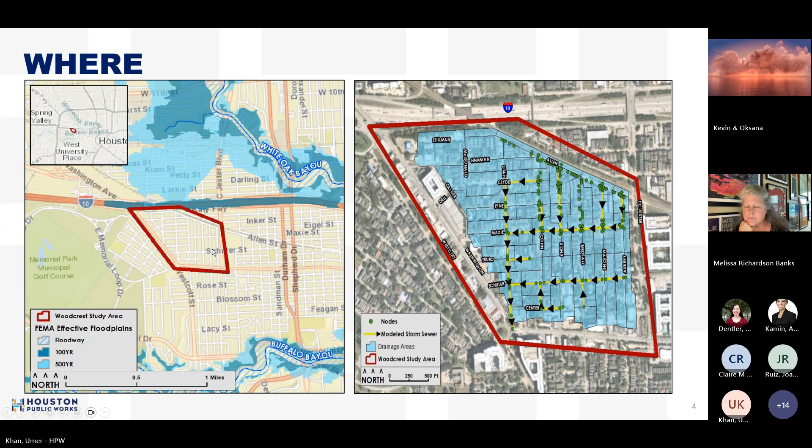So the project was subdivided into 2 phases because of the cost. But since Centerpoint relocations took up a year or so, the construction will be completed together for both phase 1A and 1B. In a minute, we'll talk about what each of these streets encompasses: Cohn, Allen, Birdsall, and Knox Street.

The project goal is to provide a 2-year level of service within the subdivision, and we also have potential for future improvements. As the Councilmember said, there's a vast, bigger drainage study done which has identified more improvements that we are finding other avenues to fund. If that comes in place, it will also help other areas as well. Again, 2-year level of service is 6 inches of rainfall within a 24-hour time period.

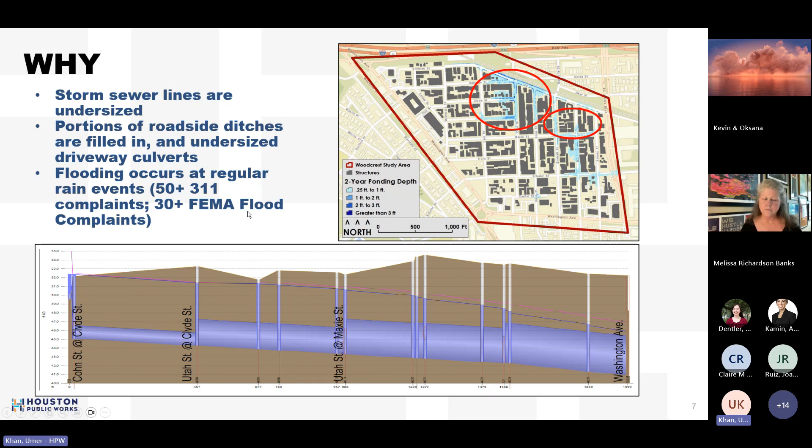Why the project is needed: as most of you would know, the storm sewer lines are undersized. Some portions of roadside ditches are filled in, and there are multiple flooding reports within the subdivision. There are 50 plus 311 complaints, and also 30 plus FEMA flood complaints, which is structures flooded within the modeled area.

Severe flooding during a 100-year event. During a 100-year rain event, the stormwater exceeds the right-of-way storage, and you can see water way beyond the right-of-way as well.

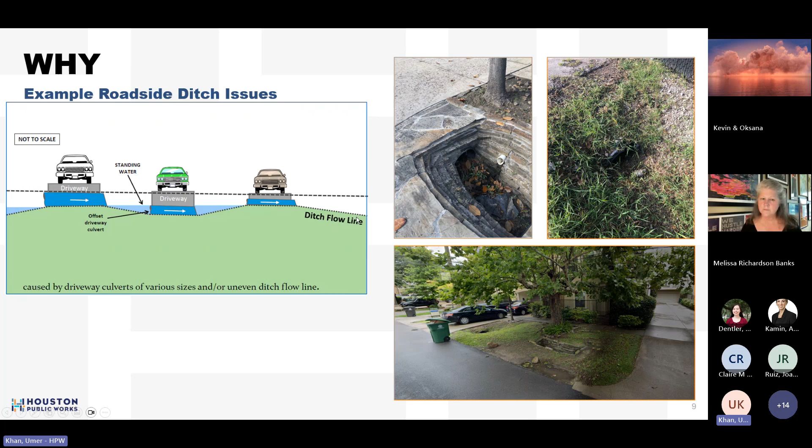Why the project is needed? Once we analyzed the area, and also did some desktop analysis, it was revealed that with silt accumulation over time, the culverts are offset, and the ditches become silted. So water tends to stand in the ditches and there is no uniform flow within the drainage system.

So phase one, like I said, it'll all be done in one phase, but on Cohn, Knox, Birdsall, and Allen, we'll be regrading the ditches and upsizing the driveway culverts to a minimum of 24 inches.

This is what a typical roadside ditch cross section looks like. We have a buffer from the edge of the pavement, preferably 18 inches, and then we have a gradual slope down, which is a 3:1 slope.

This is what is called the flow line of the ditch. And then we have a 3:1 back slope to the property line as well.

However, knowing that there are some instances where there are challenges, just like Woodcrest, we have a tight right-of-way, meaning we do not have available 12 or 15 feet of right-of-way on one side. So that's where we transition to a dual system. A dual system is where we have pipe at the bottom underground, and then we have a shallow swale at the top, with intermittent inlets to capture the surface flow.

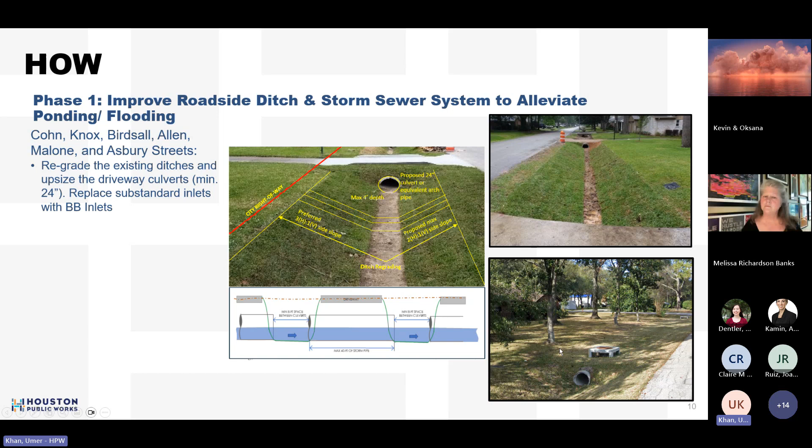Along Cohn Street, we'll be installing a 30-inch RCP. And this is what a cross-section looks like for a dual system that we were talking about earlier.

This is what a typical cross-section looks like of a street. We have a water line on one side, a sanitary sewer line deep, and then we are proposing a storm sewer. It's not a box, but this 30-inch will be a circular pipe.

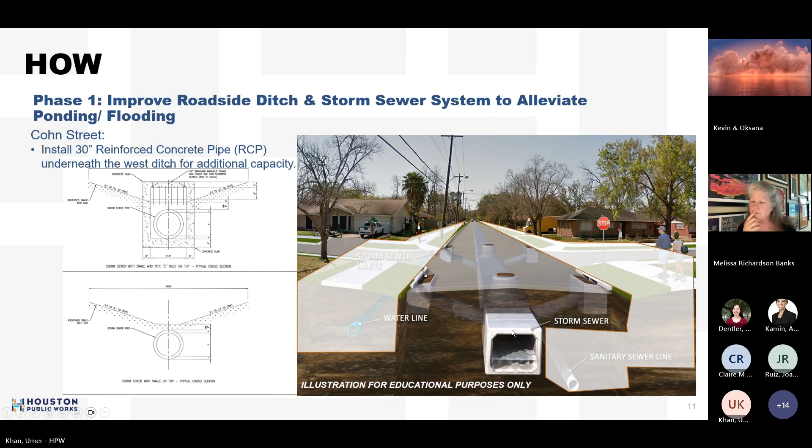Timeline: the drainage analysis was completed in February 2021. The design was subsequently approved and completed in November 2022. However, the CenterPoint power pole relocation was completed in June, and the gas relocation we just got word is completed in May.

So the anticipated construction notice to proceed is August 2024. The estimated days to complete is give or take 270, weather permitting. So we are anticipating a completion date of June 2025.

Next step: citizens need to document their existing conditions within the right-of-way before we start our project, typically 48 to 72 hours ahead. The contractor will keep door hangers on your front door. Please keep your door tag notification handy. It will have important information regarding who's handling the project and who the point of contact is during construction.

Our one request to you is please reach out to the project manager listed on the notification, or you can reach out to your council office if you have any concerns or questions during construction. Please refrain from talking to the labor who is doing their job, so that they can focus on their job, since they may not have a broader picture of what the entire project is. Remove items from the right-of-way, which are basically trash cans and all that.

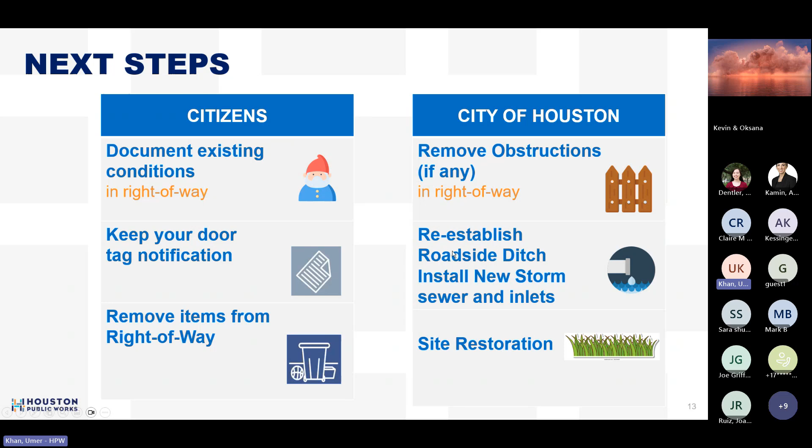For the City of Houston, we'll remove any obstructions within the right-of-way, which are encroachments. Reestablish the roadside ditch and install new storm sewers. And then after all this is done, we'll do the site restoration.

These are the frequently asked questions. Will this project cause traffic or mobility issues? Temporary lane closures to keep a safe buffer between traffic and equipment will be there. Temporary full closures will be done if needed, and there will be detours in place if that does happen.

Will this interrupt water, sewer, or solid waste? The project will not impact sanitary sewer or solid waste. However, minor interruptions for water are anticipated, because we do run into some water lines, and if we want to do some offsets in the water line, we will do that as part of our project. However, the residents will be notified ahead of time.

So what are some possible negative effects on the residents? Equipment noise, minor delay due to lane closures. Some driveways will be replaced, so people may be getting temporary driveways back.

What are the work crew hours? Monday through Friday, 7 a.m. to 7 p.m. On the weekends, typically the contractors do not work, but in some instances if they do need to work, they reach out to us, and we will reach out to the council member office so that they can let you know that on a certain weekend the work will happen.

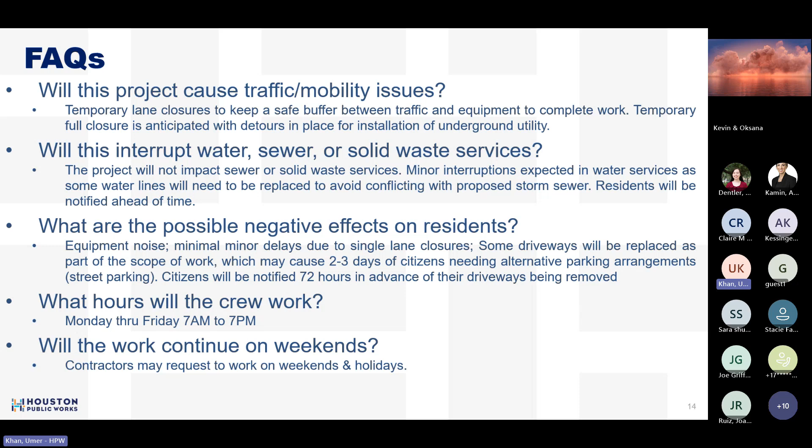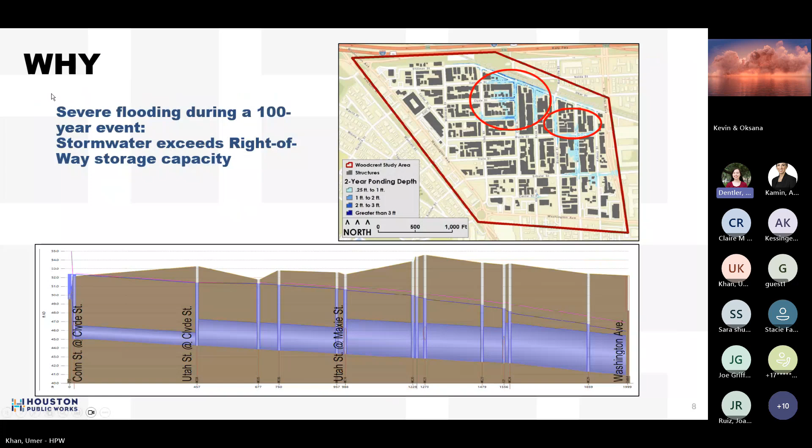Great, thank you. Please go ahead and put your questions in the chat. In the meantime, I have a question that has been submitted in advance by someone who couldn't attend tonight: will there be any road closures because of this project?

So temporary lane closures may be there because we are installing a 30-inch line on Cohn Street. So you will see temporary lane closures, yes.

Thank you. And can you please repeat the overall time that this project is expected to take? We are anticipating to issue notice to proceed on August 19th, 2024.

That doesn't necessarily mean you will see active construction on that date. The notice to proceed is for the contractor, contractually obligating him to move equipment and all that. So you will be notified at least 48 or 72 hours prior to construction. By August 19, the contractor should start mobilizing his equipment and material, and then shortly thereafter, within the next 30 days, you should see active construction.

Thank you. A question from Kevin. Is there a phasing plan that shows first street and driveway shutdowns and closures? Not as of yet. AJ?

Hi, I will be overseeing the construction team for this project. We don't have a phasing plan yet. It's up to the contractor's means and methods. We just met with him this morning at 10 o'clock on Woodcrest to set his plan, so hopefully we will have that set pretty soon. I'll say that it's one of the best contractors I've worked with in my 15 years in public works, so I have absolutely no qualms that they will do a good job on this project.

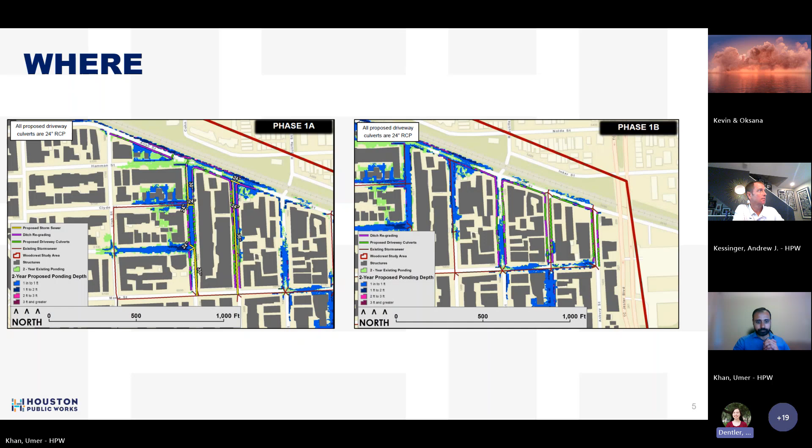It's hard for me to see because I'm on my phone who all is on the call, but I did want to introduce myself and let the residents know that I am available throughout this project, as well as AJ. I do live in Rice Military. I am the super neighborhood president for the Washington corridor, and I'm just on the south side of the avenue and live about a block from AJ.

So, speaking specifically to the residents, in the event that you are not able to reach the District C office, whether it's over a holiday or you're not able to reach Public Works, whatever the situation may be, you are absolutely welcome to reach out to me. I know most of you are probably in the Rice Military Neighborhood Facebook group, and probably the quickest way to get in touch with me is to hit me up on Facebook Messenger. But I am available to you throughout this project.

We had a smaller version of this project done in, I guess it was a block of Rice Military, and AJ was also the point person for that as well. So I'm very familiar with what's being done over here, and I want you all to know that I am available to you.